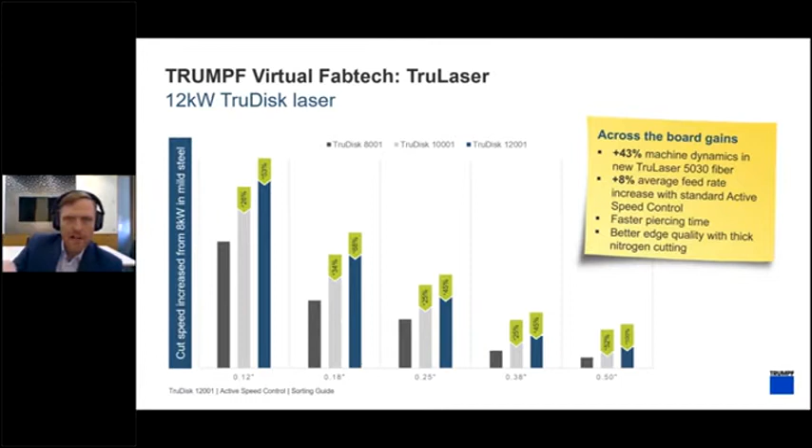That's also combined with, as you can see here in my little sticky note on the side of the screen, a machine platform that's quite a bit more dynamic. So we increase the machine's ability to move around corners and go around contours by 43%, as you can see from the chart. Really, really substantial. What we also have on this machine is something called active speed control. And we actually introduced this technology last year at FabTech. And really, this is the biggest thing to happen to lasers since, well, kind of the laser machine itself. It's really substantial.

And so what I want to do is just kind of touch on what it is and also what it's not. So active speed control is the first proactive system for dealing with anything that might occur with your materials. Like here, I've got a big old chunk of, looks like 1 1/4 steel. This is really, really good quality. If you look on the surface, you can see that the material is nice and black. This is really, really good stuff.

This is probably not what most people are cutting. So this is just a regular A36 that we have, and you can see the surface, it's not nearly as pretty as that other piece of material. Though edge quality, they're pretty darn close. And so really what we need to be able to do is control for the makeup of the material.

So maybe there's like a little pocket of silica inside the metal or something, or maybe the surface is a little bit scaled, maybe there's a little bit of rust. We need some system that can automatically control for the sort of issues that typically would occur from running into issues within the material itself.

So what active speed control does that other systems don't is respond to an issue before it actually can form. So before you can see it, we're taking a recording many, many times a second. And based on the information from that recording, we're saying, okay, the cut's okay, or maybe the cut's not so okay. And if the cut's not so okay, it'll slow the laser down a little bit. And that's going to ensure that we're keeping the quality of the part good, but also that we're not losing the part.

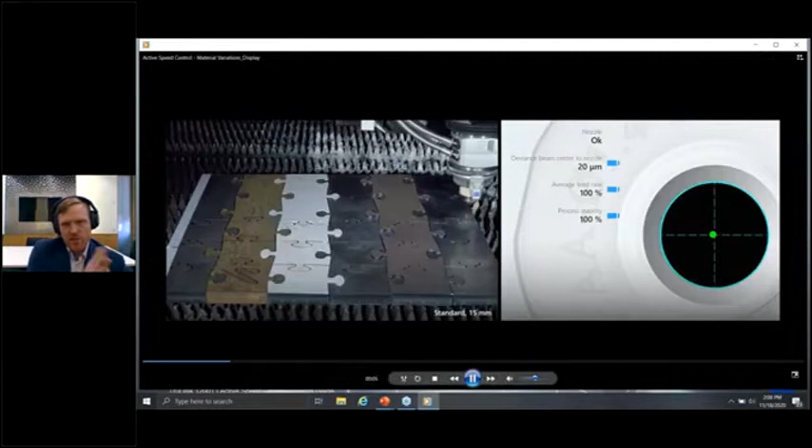So let's run a little video that shows kind of those 2 different topics we're talking about, though I'd say mostly the variations in the materials. So what you're going to see here are all the same material thickness, but just different grades of material. So we're going to be dealing with different alloys of steel. We're also going to be dealing with different surface conditions. So some of it's really clean, some of it's not so much, some of it is even coated.

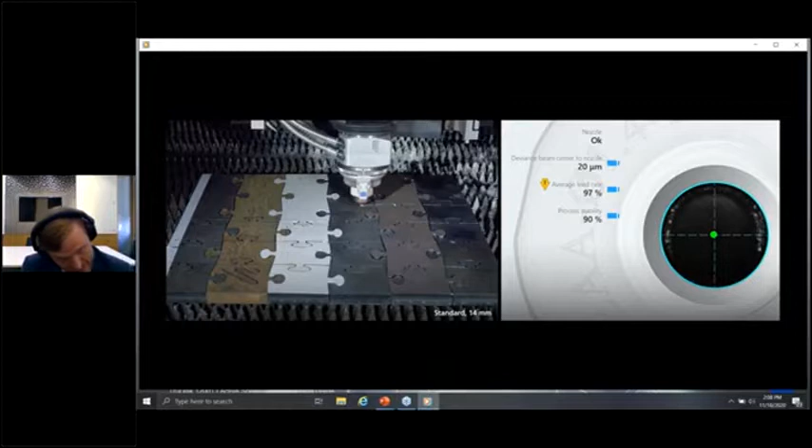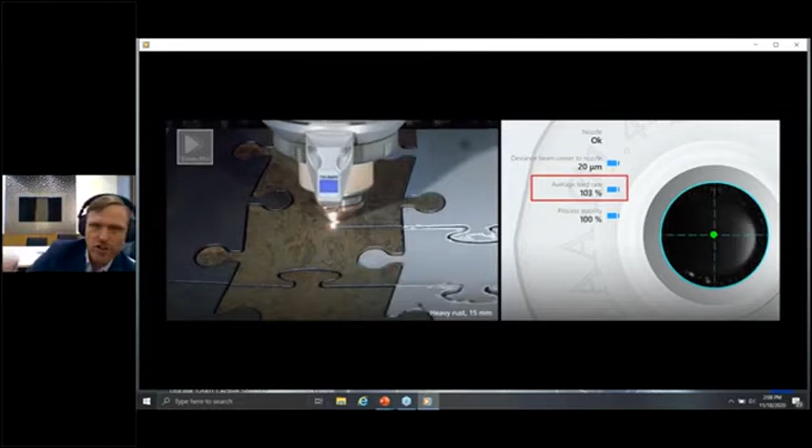And if you look, you can see that it's telling us that we have an averaged feed rate. And even on this bad material, you can see the averaged feed rate, so not what is it cutting at right now, but at the end of the job, accumulated, what is our new feed rate?

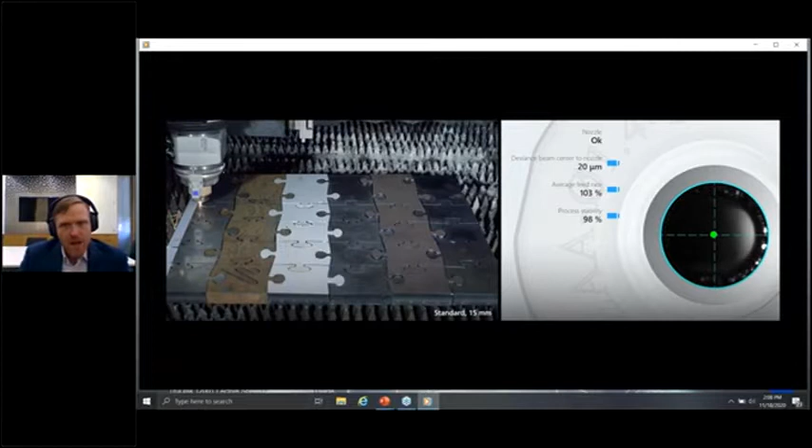And it's even pushing us past 100%. And so you see, based on the process stability figure that we're looking at, the feed rate being adjusted automatically, completely on its own. So again, this is true automation, right? It allows us to genuinely automate that process because the laser can take care of it.

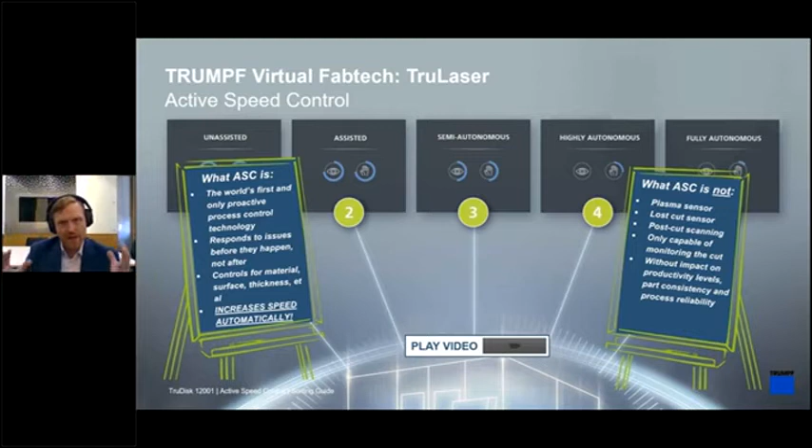You also notice that it was monitoring things like the actual beam center. So since TRUMPF uses almost like a clamping system that you have on a press brake, where it seats and centers the tools, we use kind of a similar technology for our nozzles. So we never have to align our nozzle to the beam. You only have to be concerned about where the beam is, not the nozzle in addition to the beam. And so we're also monitoring that device. So every variable is going to be controlled for here.

Now, when you combine that with the performance boost that the active speed control gives us, which is a general thing when we average it across all the different material types and thicknesses and nitrogen, oxygen, whatever it might be, this is again what we come out with, around 8%.

And so what we did is we ran a scenario. This job here, 40 pieces, that's what you fit on a 5x10 sheet, 1/4 inch material cut with nitrogen, 8 kilowatt machine, 10 kilowatt machine, and then on the 12,000 watt machine, we used the machine without active speed control and with it. And I should mention, you buy a 5030 fiber, 5040 fiber, 5060 fiber, 10 kilowatt, 12 kilowatt, doesn't matter, you're going to get active speed control as a standard feature now. All right, so that's one cool thing.

But just to show you what it's doing, the times that we're estimating generally are too low. So we have about, like you say, an 8% increase in the feed rate. Now, obviously, we have to accelerate and decelerate. So what impact does that have actually on production? You can see in this case here it's about 4%.

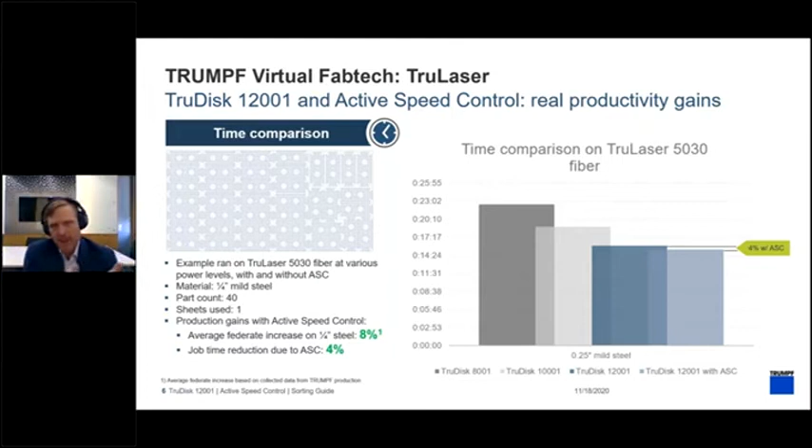So we're running this job 4% faster, not with buying more laser power, and your 8% feed rate increase is about equal to what you get from 1 kilowatt of laser power. We're not increasing the power here. We're just benefiting from the active speed control's ability to speed that thing up. So that has a really big impact on our production cost, right? And we're not even considering the fact that the laser is also ensuring that we have process reliability.

So definitely it's a good thing, you know, considering, okay, I can cut this part, takes this long, but let's kind of stretch that out to a year's worth of manufacturing. And generally what you have to consider is you're going to have things that occur, right? You're in a production facility, it's probably not air conditioned, it's maybe not perfectly clean, you have different variations in material. So we're always assuming when you say, okay, I've got a time estimate from a machine here, that this time estimate is going to be completely consistent. And the reality is that it's not, right?

Because you have to consider that you're going to have a less than 100% uptime. With active speed control, we're not only increasing the speed, but we're also making sure the laser doesn't stop, right? So it's ensuring process reliability on its own. And so when we look at a very conservative estimate here, and we say, let's take that nest that we looked at and stretch that out to a year's worth of production, 1 shift, 2 shifts, 3 shifts, and see what the sheet capacity would be, how many sheets of that job could be run.

On 1 shift, you can see you have a pretty substantial increase from 6,605 on the 8 kilowatt. When you go to the 12,000 without, I'm sorry, the first one is the 10 kilowatt. So your second is going to be the 12,000 without active speed control being considered. It's a big jump in capacity just based on the machine. But look at how much more material you get. 923 sheets with 3 shifts worth of operation.

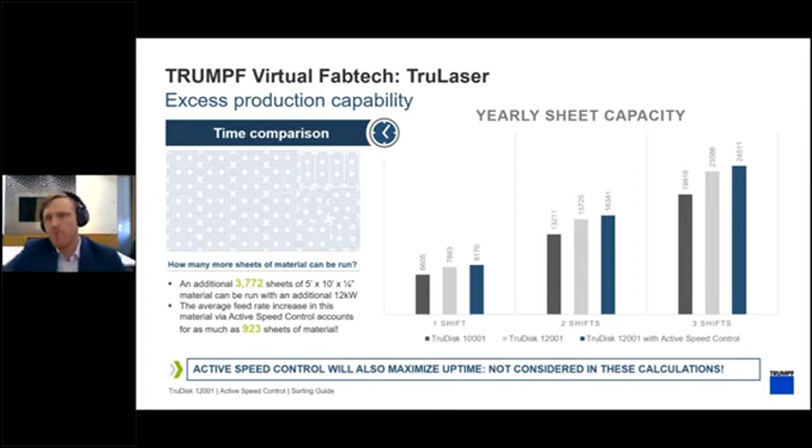And you know, kind of considering that back end of the process, you have to do something with the parts. And this is a really cool new technology that's just being introduced now at FabTech, if you will. So we have parts, right?

They're being kind of logged in our programming software saying, okay, this guy is going to go over to the bending operation. This guy is going to go be welded. This one's going directly to shipping, whatever it might be. So we're going to show you what we call a sorting guide today. And the sorting guide does a couple things.

When I'm on the back side of the machine, I'm pulling these pieces out. When I snag this out of the nest, it says this is a bending part. So I put it over onto my table with bending information. This is a part that's going to be painted. So I put that over on the table that goes to painting. This is being booked automatically into our fab software. So this is the really cool thing, the party trick that the thing has.

It's saying, okay, you remove these parts from the sheet, you put it into your unloading stack for your bending operation, shipping, whatever it might be. That is now in our job management software. So it's saying, okay, we know that the bending operation should have 20 parts. And let's say that you had one of the parts fall through the nest or something and somebody overlooked it, it would actually identify that.

So it would show the person on the backside of the machine, who in a lot of cases is not somebody with a lot of experience, probably doesn't know the process here, that, hey, you're missing a part. You need to find that one piece. And if he doesn't go find the thing laying on the conveyor under the pallet, you're going to have automatically booked into the system a job that doesn't have enough parts. So that's flagged for the press brake operator. So a really cool bit of technology there.

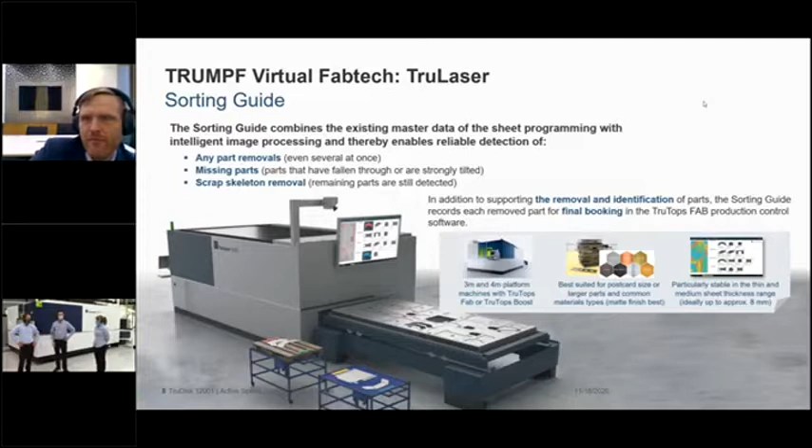So let's hop over to the whole gang. We have Ian on the left, we have James in the middle, Dagmar on the right, and they're going to kind of tag team this process for us. Okay, guys? How's it going? Can everyone hear us? How's it going, guys? Hello.

Okay, so we're going to jump in and we're going to start off by cutting a scenario for active speed control, and then we'll continue going on from there. So we'll move right over to the machine and begin the process, and we'll explain it as it's going on.

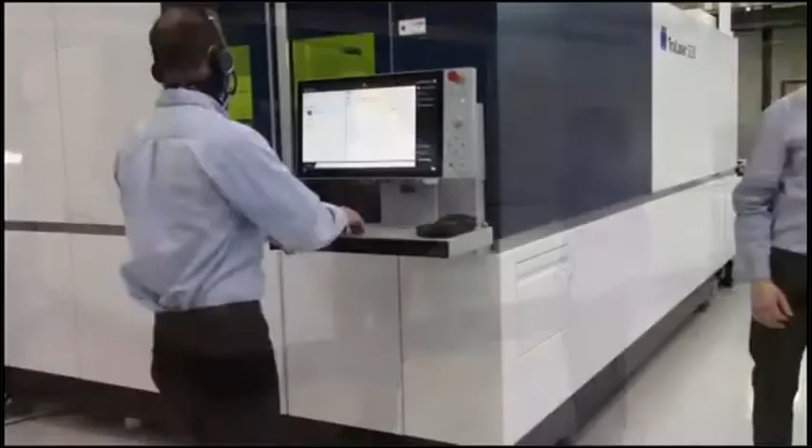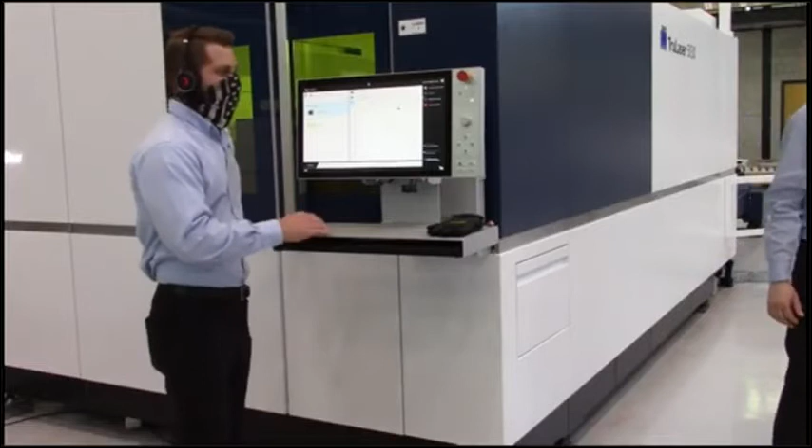I apologize, everybody had to look at my stupid face a little bit longer. I couldn't figure out how to turn my webcam off. So now we're seeing your control. Everything seems okay there. Okay, excellent. And can we see inside the machine as well? Beautiful. Okay, perfect. All right.

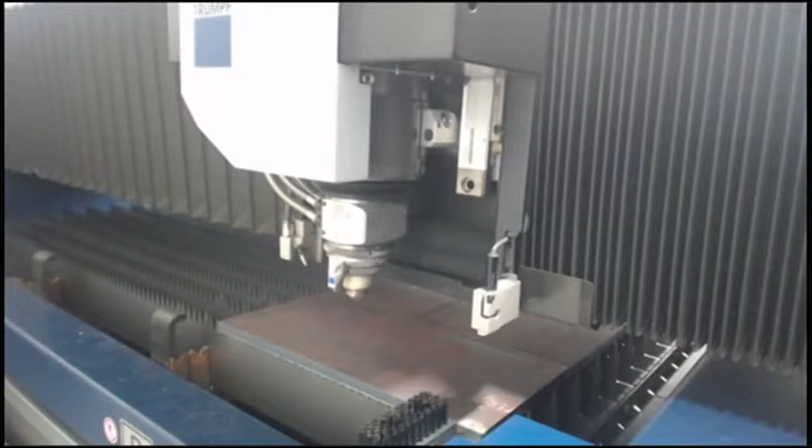So I'm going to bring up the screen here. It's going to start the program. So what I've done here in this scenario is we have 3 different thicknesses of material in mild steel. It's going to be 16 millimeter, 15 millimeter, and 14 millimeter material, but I'm cutting it all with a 15 millimeter tech table. So the machine is automatically going to adjust the speed based off of what it's seeing during the cut.

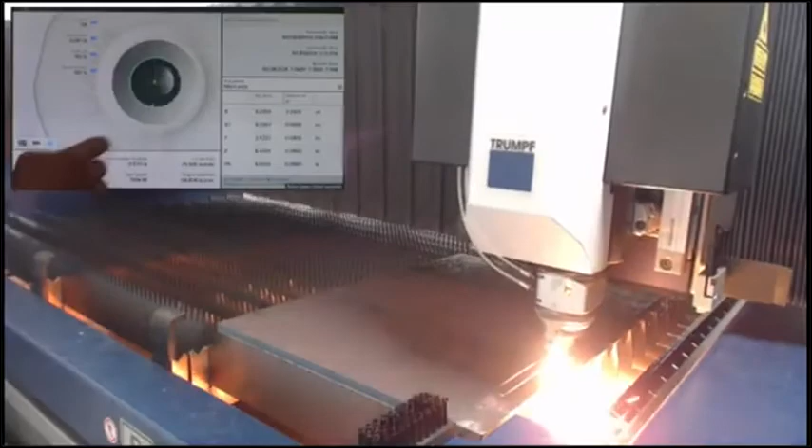And if you can see on the screen here, this is actually looking down into the cut right now. And what the sensor is doing is looking at the different levels of light that are shown in here and determining whether or not it can speed up or if it has to slow down based off of the shadows that it sees coming in the process. So you'll see as it's going in now, it's going to slow down because now we're into 16 millimeter material. As it comes back around, we're going to go back into thinner material. It's going to speed back up.

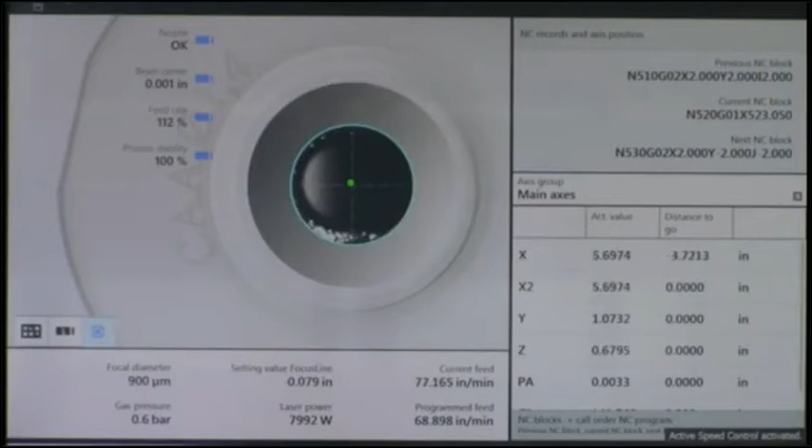And this is an extreme circumstance here, but it really shows the point of what the technology is actually doing during the process. Wait, hold on, Ian. So you're telling me if I buy a 1/4 inch nominal material, it might not actually be 1/4 inch? That's ridiculous. Yes, that is true. So we all know in the sheet metal industry, our vendors can shift and change, and somebody's way of measuring thickness might be a little bit different than somebody else. And this allows us to compensate for that automatically. So your operator no longer has to go in there and change that portion of the tech table.

This will also compensate if the material grades are slightly different. If the cutting conditions can't be optimum, it's going to slow it down to try and adjust for that. So we can see on here, we had a change in the feed rate. At one point, we were almost at 112% feed rate once we go into the 14 millimeter. Let me pull out a part real quick so you can see.

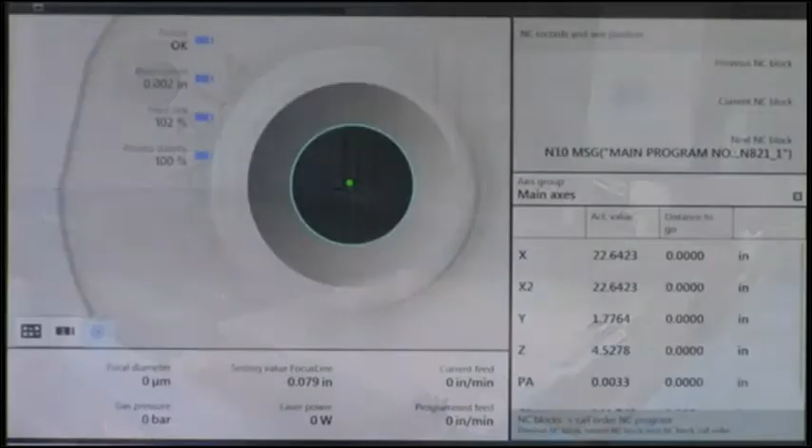Sure. While you're doing that, maybe I'll ask you, I saw on the control, and I'm sure everybody in the audience saw this too, there was a little readout that said focal diameter, and that went from like 210 micron to, I think I saw like 900. What's going on there? What's the change in the focal diameter? So that's actually piercing into cutting. You're not necessarily going to be piercing with a 900 micron beam. You're going to be piercing with something thinner to get through the material faster.

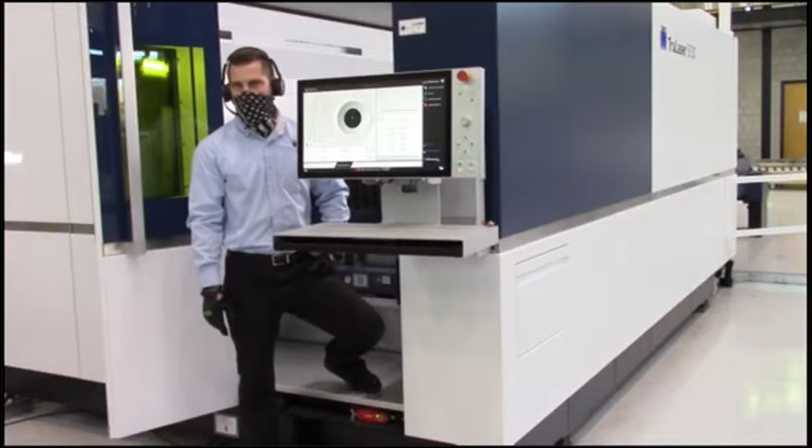So folks, I apologize. Ian's a Harley rider, I'm a Ducati rider. This is why I understand a segue better than he does.

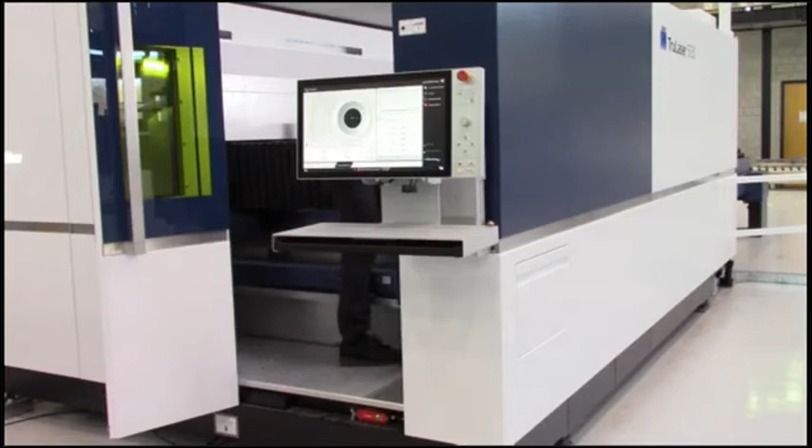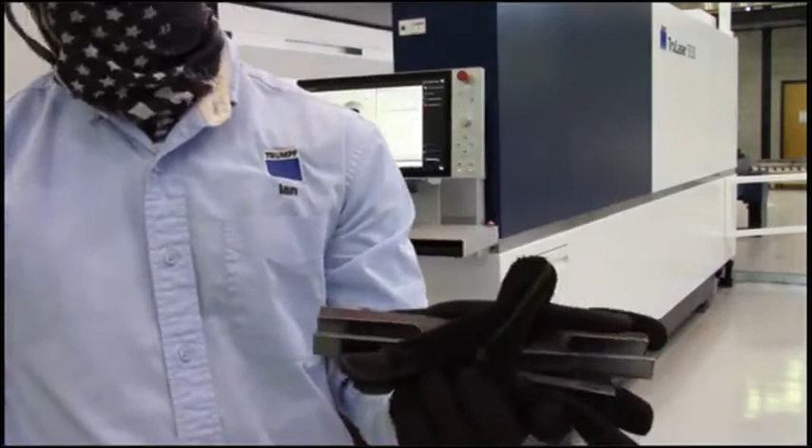The large beam diameter you saw was BrightLine fiber. The cool thing about BrightLine fiber is that it gives us an enormous beam diameter range. So when we're cutting in this oxygen range, we want to be able to make a much larger laser beam. And so rather than being restricted like you normally would with a fiber laser to a pretty small focal diameter, so you use tricks, collimation in the cutting unit or shifting the focus lens, we actually change the mode and the beam on the fly. So you get a much bigger beam and you do so much more quickly, and you get the sort of quality that you see there burn through Ian's glove.

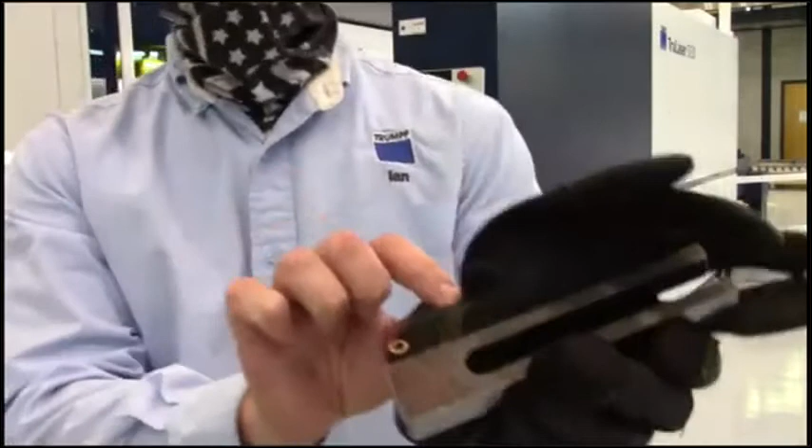Yeah. So we have 14 millimeter right here. And then hold on one second. It's hot. And then this is actually 16 millimeter, all cut with the same tech table. You can see the machine was able to adjust for us. There are 2 different thicknesses, the same tech table, and we were able to cut them without issue. Yeah, it's definitely impressive. I can imagine it is warm.

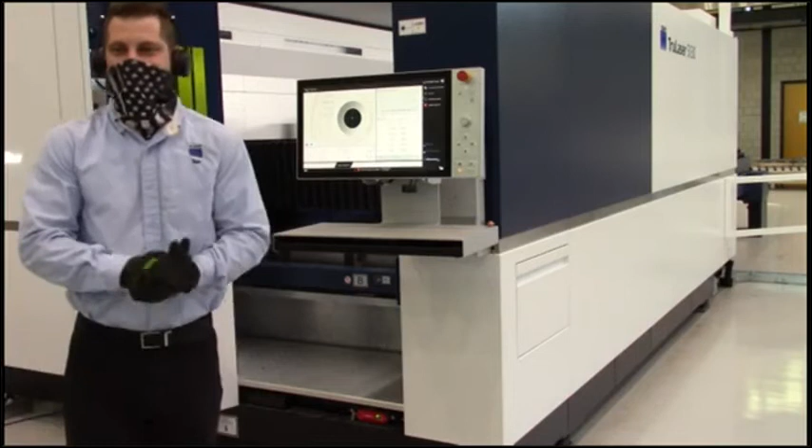And this is kind of the future of development that TRUMPF wants to take. What we want right now and what we achieve is controlling, of course, the feed rate. This is just the first step. We really want it to become kind of self-contained. When the laser's cutting, hey, laser, just sort things out, right? Not everybody has someone in here to be able to tweak tables and whatnot. So the machine's extremely important, especially going forward when more expensive labor markets like we have in NAFTA are trying to compete with cheaper labor markets.

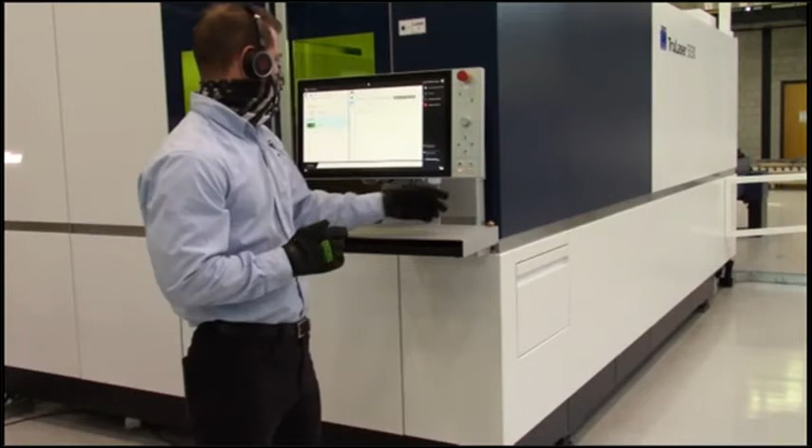So the laser is becoming more and more adaptable. And with the continuing development of these processes, we really want to get to the point where the thing just does it on its own. Says I'm cutting now, I'll adjust all the other relevant parameters outside of just speed. So this is just kind of a jumping off point for us. All right, so what do we have next?

Okay, so now we're going to jump into some cutting 1/4 inch, and while we're doing that, it's going to change nozzles for us. We've created a scenario where it's going to first look at a nozzle that's no good, and with the smart nozzle automation, it's going to take a picture of that nozzle and determine that it's no good. Now we have another good nozzle in the nozzle changer, and it's going to automatically change over to that one and begin the cutting process. So we'll go ahead and jump right into that.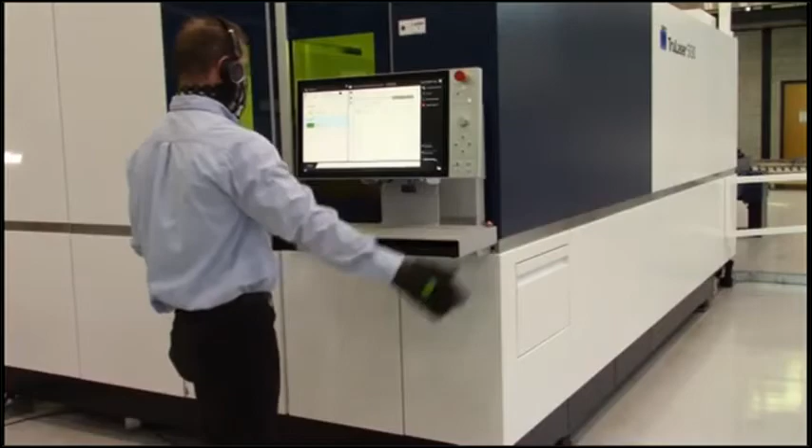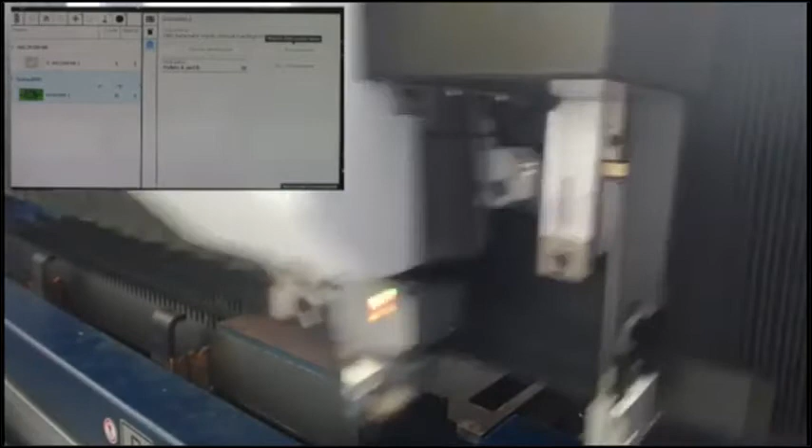Sure. So that's an important part of the true automation, right? We're starting the cutting process with active speed control, but let's say you have a tip up. The machine has to be able to make sure that your conditions are still good. So on all of the TRUMPF product lines, not just the 5 series fiber laser, we have 360-degree collision protection. So if you hit it from the side or from the front, we can stop that motion unit in, gosh, what is it, 15 milliseconds?

It's incredibly fast. To the point where you probably wouldn't even see that there was a collision, but it was able to respond. And so the thing you have to consider is, did I damage the nozzle? If you damage the nozzle, of course, it needs to be replaced. So this is capable of taking care of that on its own. The first motion it's doing, it's actually checking the ASC, the alignment of the beam. After that, it's going to go over to the nozzle camera and take a reading of the surface of the nozzle. So this is checking beam center? Mm-hmm. Perfect.

So now it's going over and it's actually taking a picture. It's going to determine whether or not the nozzle is good enough to use. So even with the 3-piece nozzle, the camera is capable of identifying if the sleeve's bad? So it sees that something's wrong with the nozzle, and it's going to try one more time to make sure.

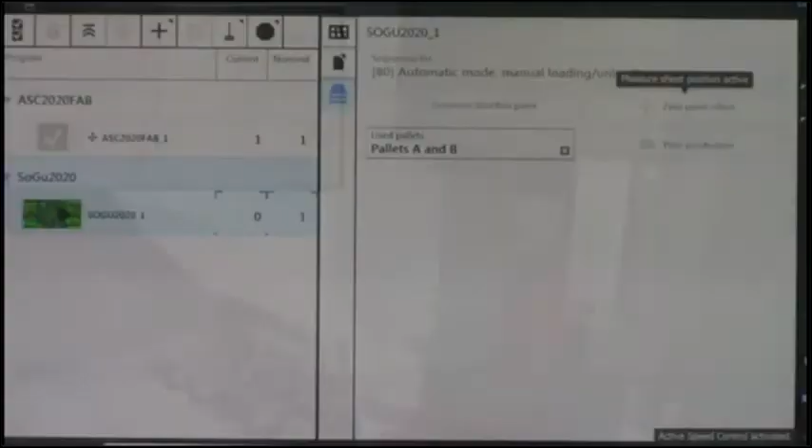This is a really nice feature if you're planning to run automation overnight. You would put multiples of the same nozzle in there, and then if there was any issues with collisions or anything like that, it would check the nozzle. If anything went wrong with the nozzle, it's going to switch over to one that it knows is still in good standing.

So now it's determined it's no good, and it's going to go and grab a new nozzle. After it begins cutting, I want to show you another feature on the machine that's really nice, what we call parallel to production nozzle changer. While it's actually cutting, you can pull the nozzle changer out of the side of the machine and replace any damaged nozzles without interrupting your cutting process.

So what is it that triggers the nozzle checking? There's different settings that you can have in there. We have it set up right now so that before it uses a nozzle, it's going to go ahead and check it. But you can also set it up for a certain amount of pierces or collisions or timing.

Okay, so if you see on here, we actually see the surface of the nozzle that it read and decided was no good, and we can see the indentations in there. I can pull that nozzle out for you, and you can see I actually took a file and cut into the nozzle so we could see an extreme case.

Okay, so now it's jumped into the cutting process. If we go to the outside camera real quick, I can actually pull this out while it's still cutting. Now it was this nozzle that was no good. I can pull that one out and put our new nozzle in. And then we tell it that it's reset. Now I don't know how close I'll be able to get this in here.

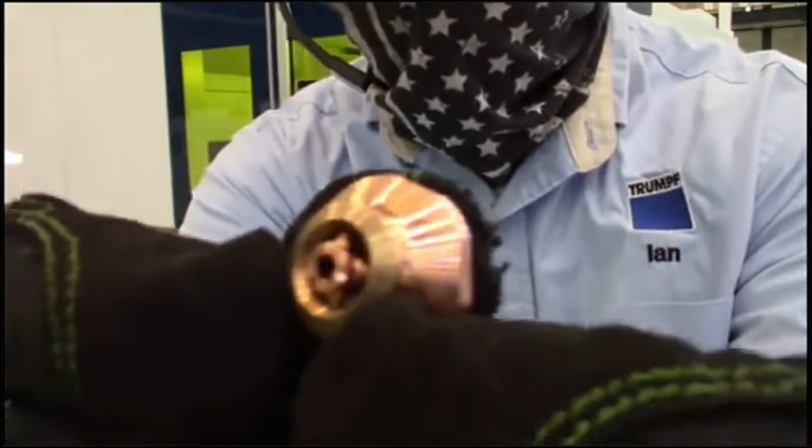But if you can see, there's actually weird marks on there. That's where the file cut into it, and that's what it was picking up on the screen.

And so now that I've shown you that, James is going to talk a little bit about the cutting program that it's doing right now.

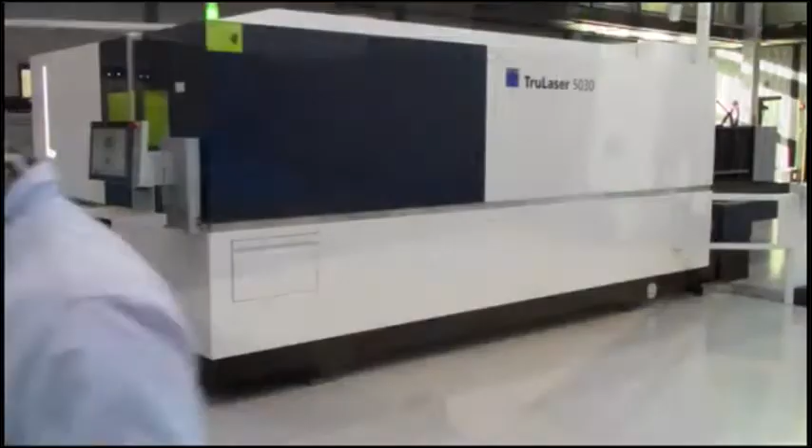Okay, hey guys, so hopefully you can see our screen here on the inside, and we see the machine moving around, cutting our parts out. But you'll notice that it's doing it in a really specific way. What we are doing here is a special programming technique and cutting technique called smart collision prevention.

Basically this is an algorithm in our TruTops Boost software that allows the machine not to crash. It looks at all the parts, all their placements on the slats, where all the lead-ins are, all of that stuff, and how they're going to fall and tip. And then it creates a cut path that allows the laser to cut all the parts without crashing into the cutting head, and it also can take into account the automation system that you have.

So not only is it not crashing our machine, but it's also not crashing our automation. And what this allows you to do is a lot of dynamic nesting without worrying about crashing the machine, or whether this nest is going to work or not, or having to watch it constantly.

You'll also notice some other features that it's doing, specifically scrap cuts. It does those in a different way than we're used to. It's actually doing some right now, where it cuts the scrap cuts and then moves around and cuts each piece away, always moving away from the tipping part so that it doesn't crash.

You see it's doing some other stuff. It'll cut certain contours partially, like right there. It leaves a big tab on the material to then cut it back at a later time when it's safe, when it knows it's not going to cross back over that path and crash the laser head.

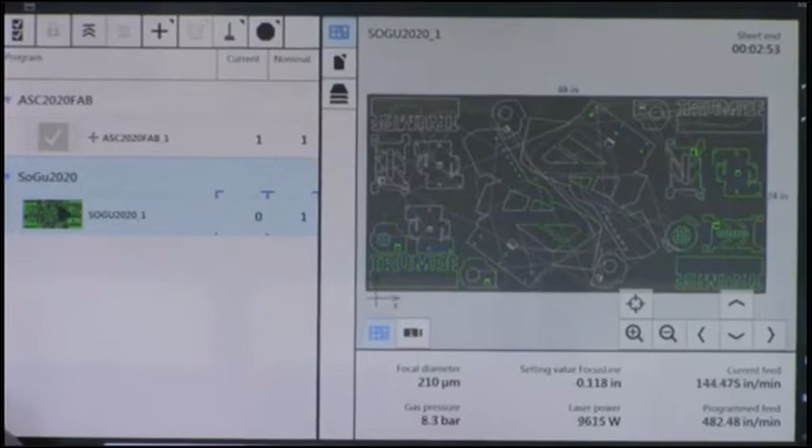Some other stuff going on right now. I don't know if you guys can see too closely, but we're using a special nozzle as well. During this cutting process, we're using high-speed eco, our special nozzle technology. It's a touchdown nozzle, and I'll actually stop the machine right now and pull a part out to show you guys.

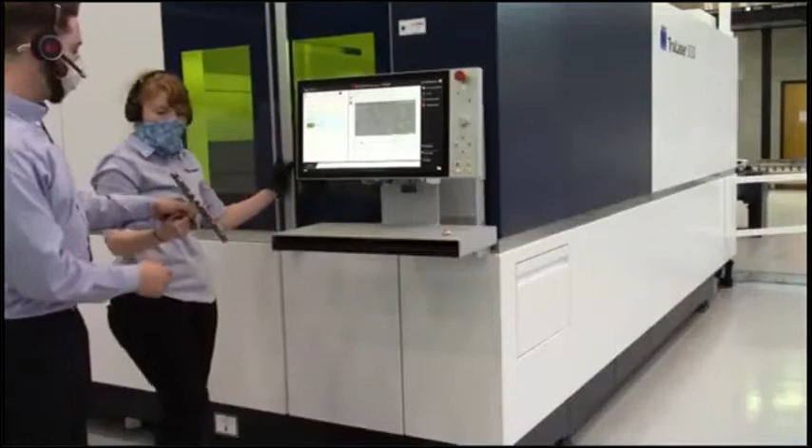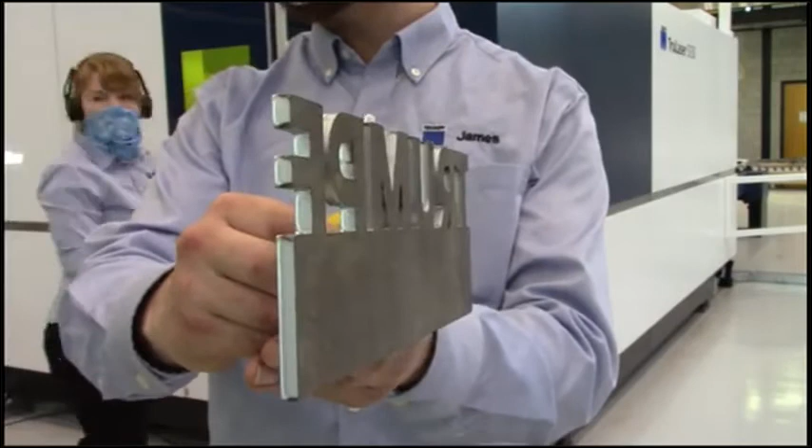This allows us to cut about 2.5 times faster than our standard single orifice nozzle. It also saves gas, up to 70% over your standard conical table nozzle. Hopefully you guys can see the side edge here. It's a really nice looking part. There's the top of it, and there's our bottom. Really nice looking. We don't really have any dross or anything like that. It's cutting at 482 inches per minute, using nitrogen.

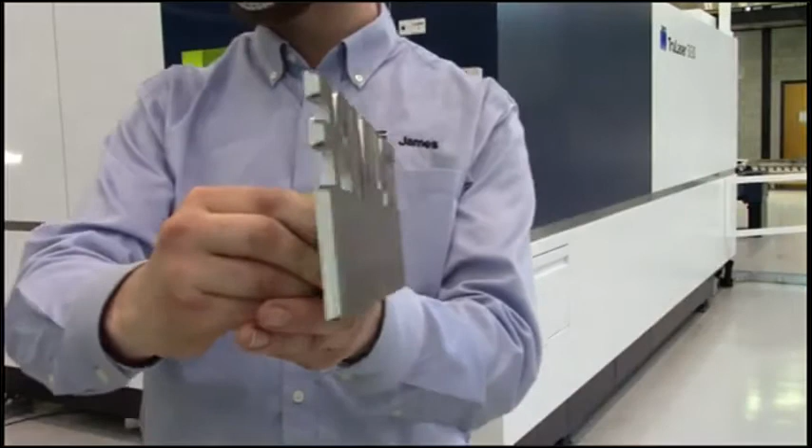With that really low pressure and consumption, that's how we're capable of getting away with compressed air cutting without having a compressed air generator. Exactly, so this allows you to not only cut effectively and efficiently with nitrogen, but allows you to do some other special things. Like Brett was saying, you can utilize air.

This cutting technique uses low pressure, 4 to 6 bar is what we're typically seeing, and that's what's allowing us to get away with using a lot lower volume of nitrogen. The nozzle design itself is encapsulating that nitrogen as well, so it's not letting it blow off into the environment. It's pushing all of it through the kerf, allowing for a really nice looking cut because you're containing all the gas and efficiently pushing it through the kerf.

Also allows you to contain all of it in that sleeve, and in conjunction with the low pressure, allows you to have a gas consumption of around, what is it Brett, around 1,200 cubic feet per hour. Yeah, that would be worst case scenario. I think 1/4 inch is 1,100 and change. So it's very, very low consumption.

What's interesting is you can use the nozzle technology for a wide range of materials. On this machine specifically, 160 thousandths of an inch steel, up to 3/8 or 1/2 inch if you want to go really crazy. And then in stainless steel, 160 thousandths of an inch up to 1 inch. So you're using the same nozzle for all of those different things.

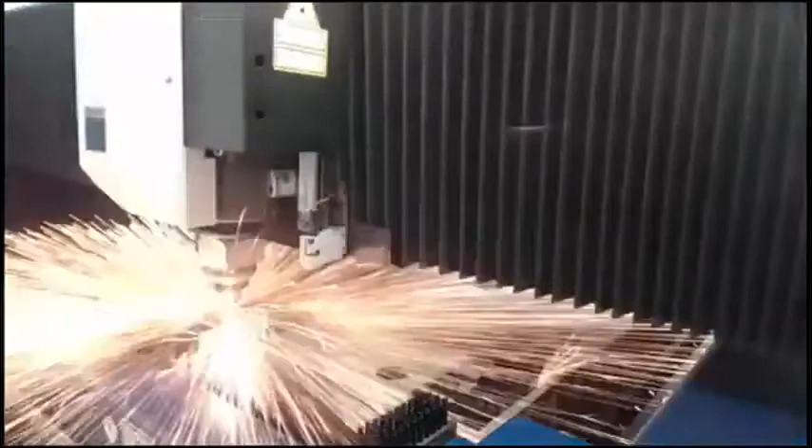You can see that James is being really aggressive, it's just pounding down into position during pierces. If you were cutting a diamond tread, the laser would have no issues with it. Corrugated material, the laser has no issues with it either. The beauty of the high-speed eco is that little guy allows us to deal with non-flat surfaces, which is usually the difficulty with nozzles that have really shallow offsets to the surface. That's how we're able to solve that issue.

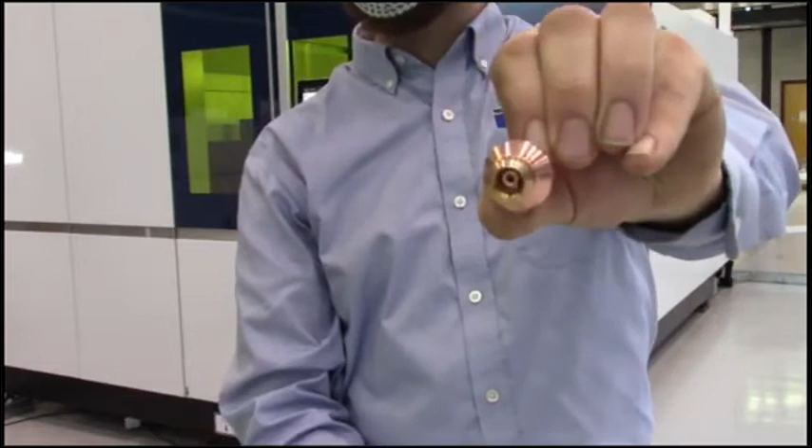So you guys can see here, the sleeve right here kind of moves up and down. Pretty sweet, you can see that sleeve moving up and down. Really awesome nozzle technology. The only complaint I have here is it cut that 1/4 inch sheet extremely fast, it's actually done right now.

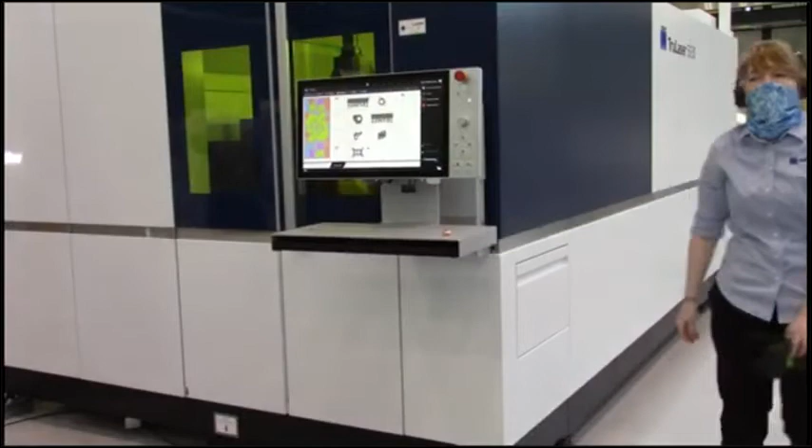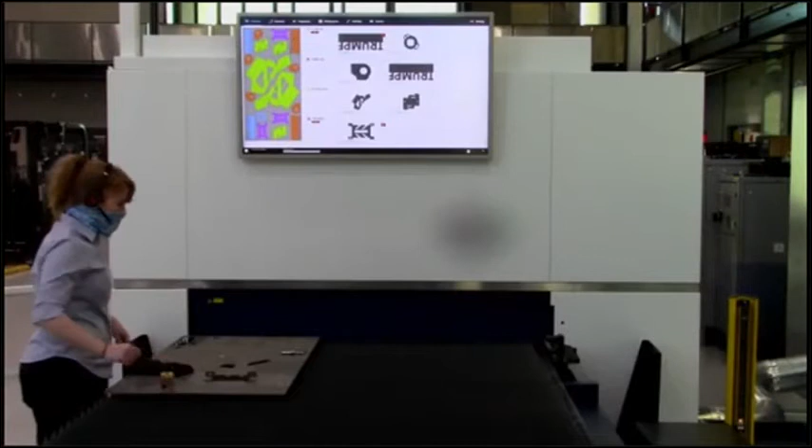Dagmar, welcome. Hi, Brett. Hello. Can you hear me? We can hear you just fine, and you have to be nice to me now because we have an audience.

Okay, so Brett already talked to you a little bit about our last point that I would like to highlight here. It's our new option, the SortGuide. The SortGuide is basically a

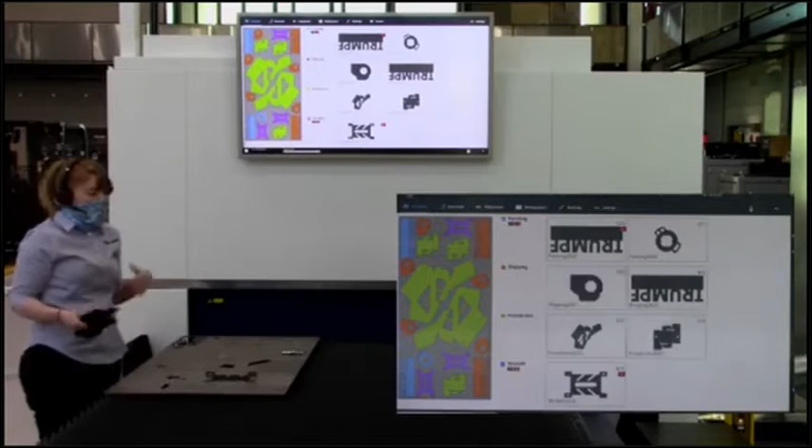camera-assisted sorting help for after we have cut our sheet. This means we have here our cut sheet, and here I can see what I have. You can see I have it grouped into different next stations where it has to go, like painting, shipping, press brake, or TRUMPF. So you could sort it in whatever way you want, like different assemblies, or different customers or follow-up processes.

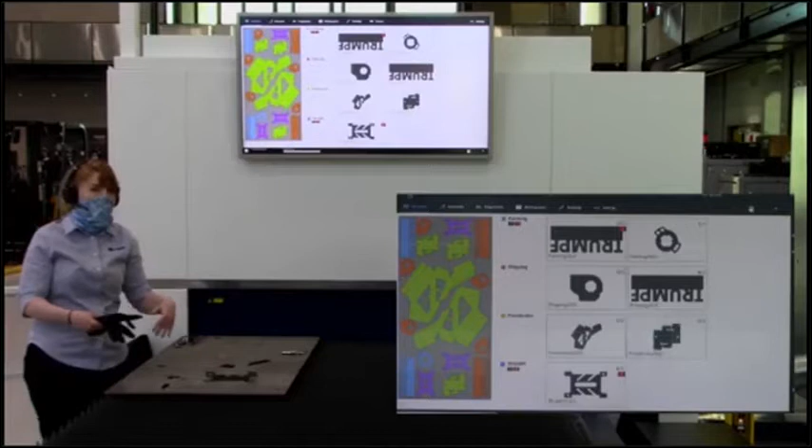You can already see, we have here for our first part in painting, it has this little red 1 on it, and also our TRUMPF part on the bottom, because it already detected that one part that I took out while James was talking and showing the edge quality, and we had a little tip up basically, so this is a part that potentially fell down while we had our pallet changer. So when we now start taking out parts, you will see on the screen how it will select only

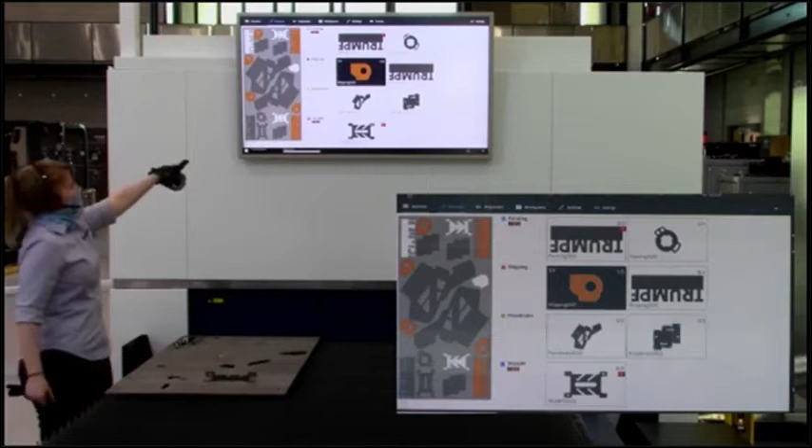those parts that belong to the same group. So here I started now for the parts that I want to send to shipping, and you can see those parts are missing on our screen, the ones that were already removed and the parts that I now removed.

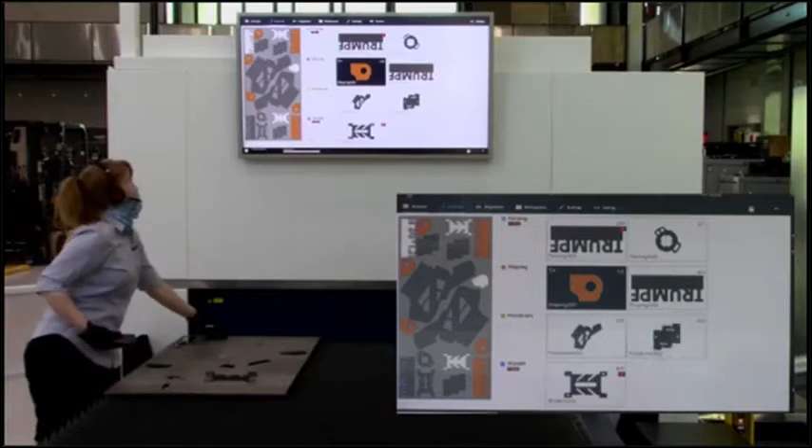And when I go on like this, you will see how one part after the other will disappear from the screen. And now you might think, okay, I'm only one person, but what if there is a second person that helps me taking out parts?

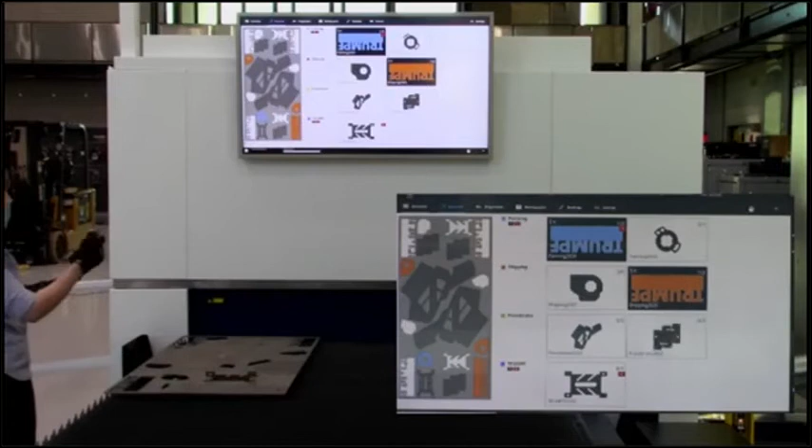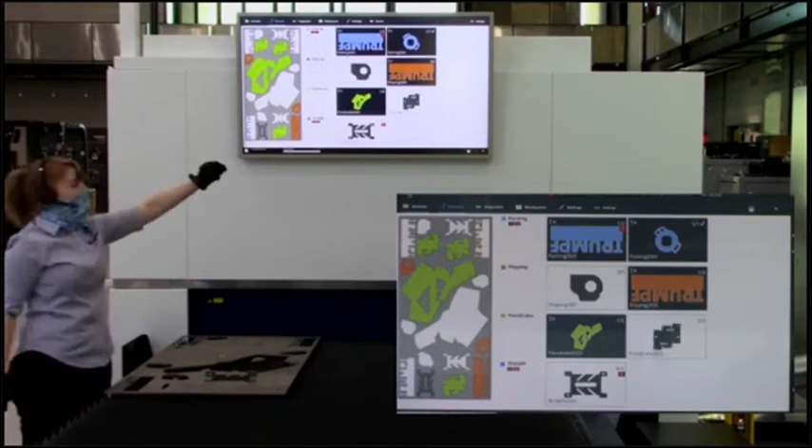It's also really nice when I have, for example, 2 really similar parts, like the TRUMPF part I took - I have it once in blue, once in orange. So it shows me exactly, hey, you're still missing one from the orange group, so I can grab this here and have them all out.

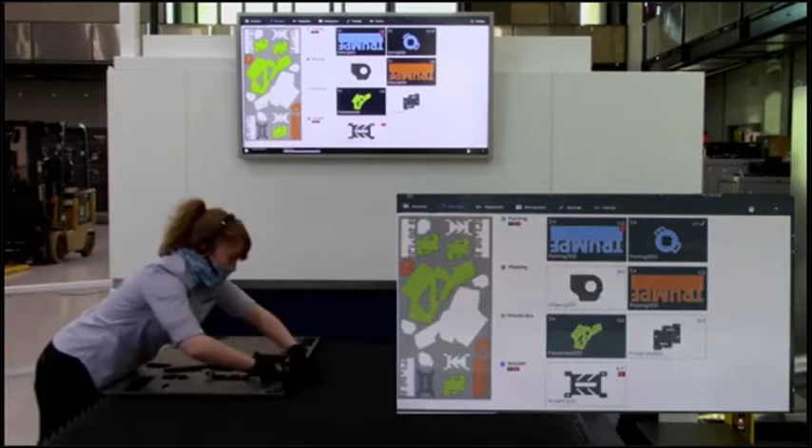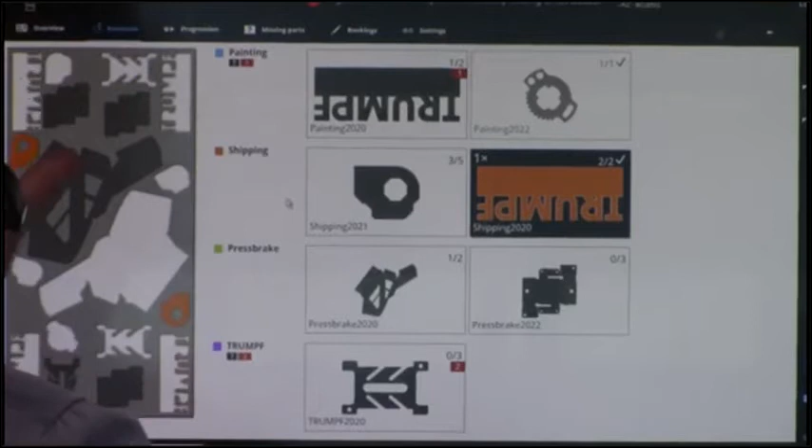And now I'll stop at this point and just want to quickly show you on our control in the front how we can also organize or tell it when we would have, for example, accidentally a part scrapped or something like that happen. So this is our screen, and then we have here the booking.

So here in the booking, I can now say, okay, I retrieved that one blue TRUMPF part that I had taken earlier and I put it to my other parts. So we have them all here, and we have a nice green, easy to read checkbox that they are all here. And then I'm like, oh, where are all my shipping parts.

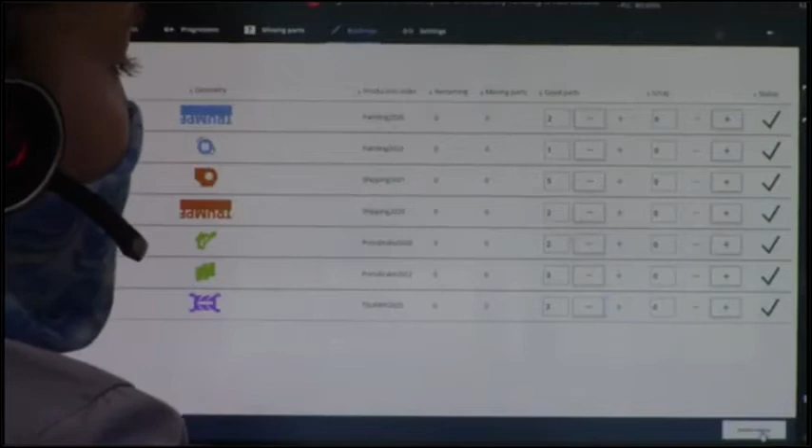So maybe, for example, I had scrapped one, so I also can tell my system if I had one that got lost or accidentally bent up or things like that. And when I have them all booked into my system, I can say, finish my sheet, and it reports back to our TruTops Fab system, and we know how many parts we have or what we are missing.

Okay, that's it from our machine for today, Brad. Okay, thank you very much, Dagmar.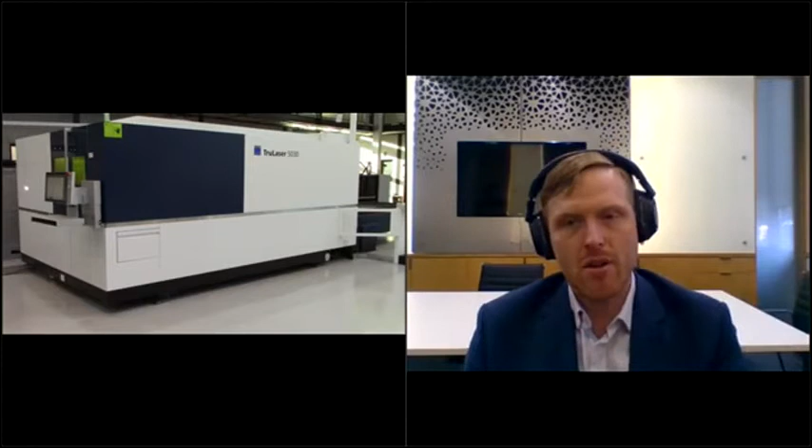So that's really cool because TRUMPF is really putting a lot of focus on Industry 4.0. So if we're looking at scenarios where we have a lot of interconnectivity on the machines, all these lasers and press brakes and punches have an OPC-UA interface. So the machine is capable of gathering data and sending it out. It could be data that is stored within your own MES - that's going to be a little bit more limited. You also would have some information that could go back into a software like our FAB software. It's really cool from the perspective of us really being able to control it and have a good overview of your manufacturing processes. So thank you everybody for your great support.